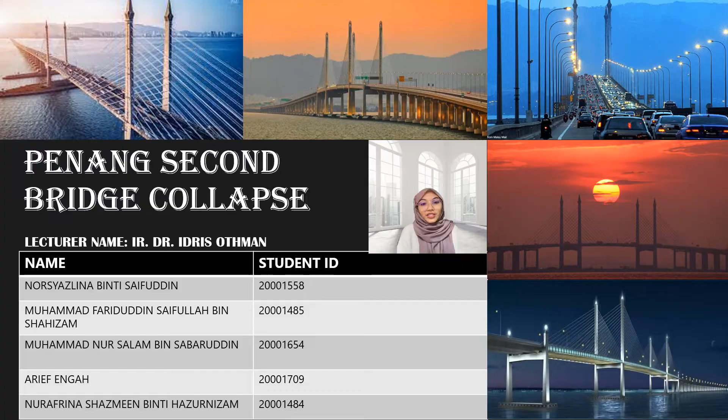I'm Norsyazlina binti Saifuddin and my groupmates are Muhammad Fariduddin Saifullah, Muhammad Nur Salam, Muhammad Arief Engah and Nurafrina Shazmeen. Penang Second Bridge is one of the largest projects in Malaysia back in 2013.

The length of the bridge is 16.4 km, while the length of the expressway is 7.1 km. So the total length of the bridge, including the expressway, is 23.5 km. The total cost of the project is 4.5 billion ringgit Malaysia. The overall construction period is 60 months, which equals 5 years.

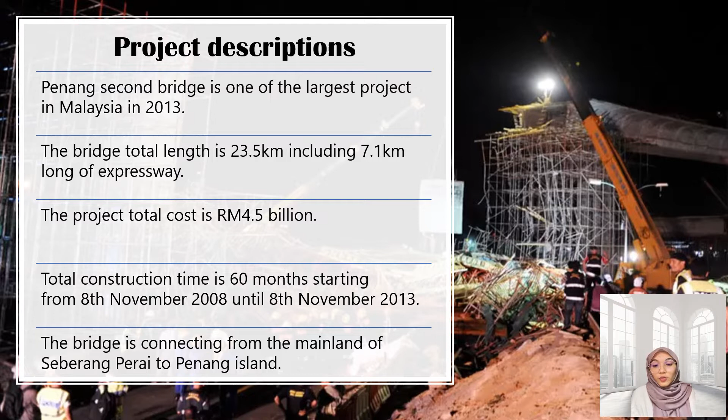The project starts on 8th of November 2008 and finishes on 8th of November 2013. The bridge is officially open to the public on 1st of March 2014. The bridge connects the mainland of Seberang Perai to Penang Island, which are Batu Kawan and Batu Maung respectively.

Next is the details of the incident. A 30-meter long section connector of the bridge at Batu Maung interchange, which was under construction, collapsed on 6th of June 2013 around 6:50 p.m.

The incident caused the death of 1 civilian and injured 4 others which is 2 civilians and 2 workers from Indonesia and Myanmar. In order to set the victims free, 4 hydraulic jacks were installed to lift the debris and rubble of the collapsed ramp.

The injured victims were hurt by falling concrete and steel when the interchange ramp collapsed. The construction companies involved in this project are Cergas Murni Sendirian Berhad and Giga Engineering and Construction.

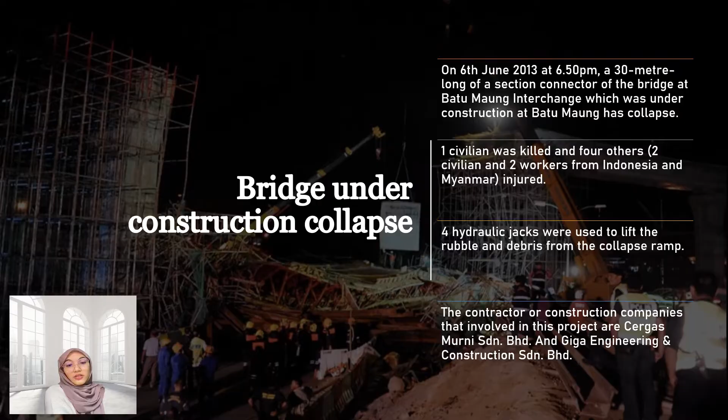The possible causes that led to the incident are being investigated from several aspects. The first is from the Code of Ethics, related to Board of Engineers Malaysia (BEM) and Occupational Safety and Health Act (OSHA). The second is from the designation of the project. The third is from the management aspect, and the last is the nature aspect.

The first factor that led to the incident is the contractors did not register their workers with the Construction Industry Development Board (CIDB). From CIDB Act 1994, Act 520, workers at a construction site must have industrial personnel registration cards, or green cards, to prove that they were registered with CIDB.

The second cause is that formwork support failure was the cause of the collapse. According to the Act, contractors and workers need to follow the exact design, and any changes need to be approved by the engineer or designer.

The third is poor risk management. The risk management of the project must be scrutinized to prevent unwanted incidents. The road was not closed or diverted, and the public had to pass under the concrete ramp which was under construction. The last cause is the malfunctioning drainage system at the construction site.

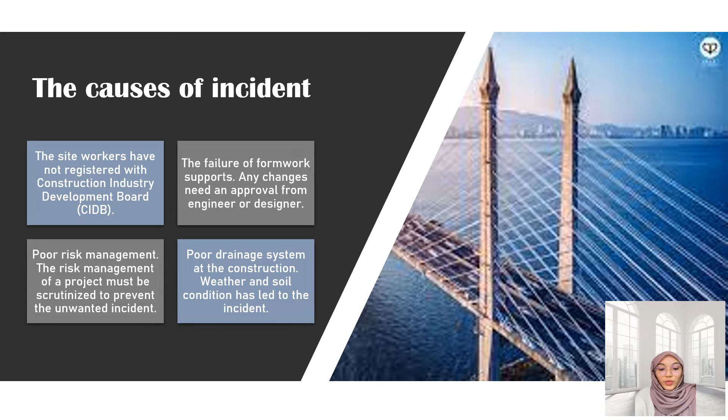Another cause that led to the incident is the weather and soil condition. The structure was built on low-lying ground. When the rain came, it turned the low-lying ground into a water retention pond, as there was no drainage to quickly remove rainwater from the area.

Next, the following are the objectives of this research project. Number 1 is to investigate the procedural and technical negligence by the contractor for not registering workers with the Construction Industry Development Board (CIDB). Number 2 is to investigate the cases that contravene the design project specification that caused the ramp collapse. Number 3 is to examine the environmental and public safety aspects of the structural collapse due to poor risk management and poor drainage system.

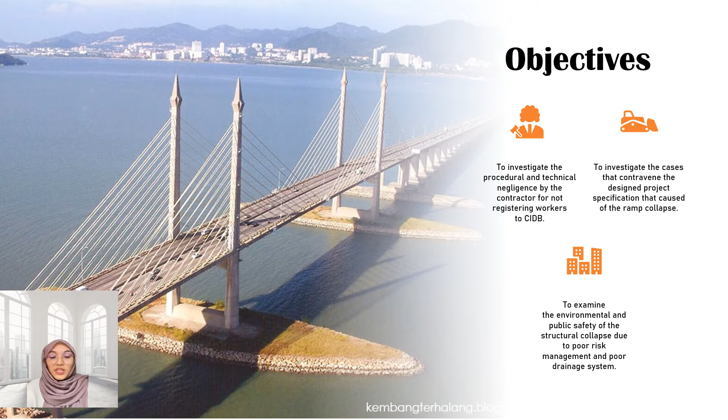Assalamualaikum, I am Nurafrina Shazmeen binti Hazurnizam. I will continue with the rescue operation of the Penang Second Bridge collapse. In this part, I will talk about the reported article, the rescue personnel, and the rescue operation.

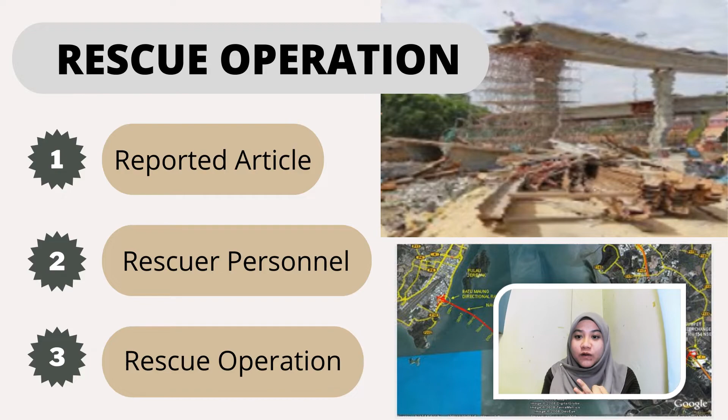The first reported article, on the Malaysian Insider, said that the scaffold supporting the construction of the second Penang Bridge collapsed and killed a passing motorist. The commission at the time stated that the collapse was because of the failure of the scaffold.

The bracing installation was not constructed according to the drawing. Supposedly, the diagonal bracing needed to be in the transverse direction to reduce the load-bearing capacity.

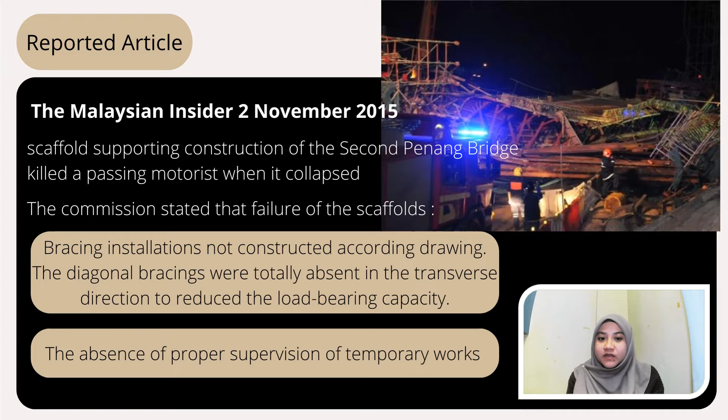Also because of the absence of proper supervision of the temporary works.

The second article is from Awani. It said that a 30-meter concrete slab weighing more than one ton crashed down to the ground. A crane is being used to lift part of the debris for the rescue effort, and several fire brigade trucks were rushed to the scene at about 7 p.m., where the collapse happened around 6:45 to 6:50 p.m.

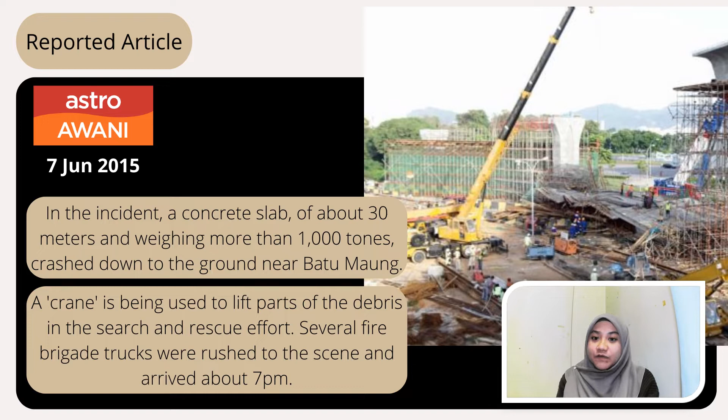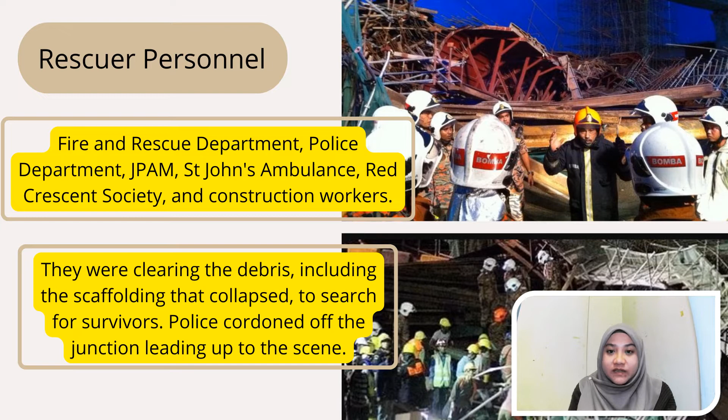Next is about the rescue personnel involved in the rescue operation, which include the Fire and Rescue Department, Police Department, Jabatan Pertahanan Awam Malaysia, Saint John Ambulance, Red Crescent Society, and construction workers. It stated that more than 300 rescuers worked at that time. They were clearing the debris, including the scaffolding that collapsed, to search for survivors. Police cordoned off the junction leading up to the scene for their safety.

The rescue operation: as the ramp collapsed around 6:45 to 6:50 p.m., the fire and rescue department arrived at about 7 p.m. They cleared the rubble to allow rescue, or to approach the stranded car. There was a car that crashed down below the slab. They used a camera to detect the condition of the victim. The police commanded those with missing family members to call them as soon as possible.

After that, MTUC Penang called the Department of Occupational Safety and Health to conduct the investigation. As the probe began, the primary focus of the initial investigation was on the failure of the formwork support. The rescue operation has been going on for more than 14 hours.

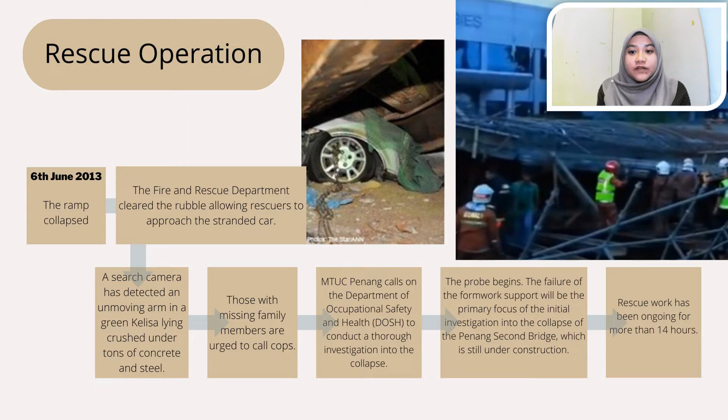Next, I would like to talk about the technical reasons for the failures of the second Penang Bridge. According to the Director of the Department of Occupational Safety and Health for the State of Penang, Muhammad Anwar MB, he said that the failure of the formwork support was one of the reasons that caused the ramp to fall. This is based on an early inspection conducted by his team.

When we begin a certain project, especially building a bridge, the technical designation of the bridge must be approved first by a relevant and qualified engineer. Any changes required for the formwork support must first be allowed through the engineer or the designer of the project to ensure the quality of the bridge we are going to build. Every parameter and calculation is important in the technical designation to produce the highest quality project.

Next, according to a report by the Penang Commission of Inquiry, the scaffold that collapsed at Piers 6 and 7 of Ramp 2 in Batu Maung was declared severely faulty or defectively constructed. This concludes that the formwork support of the bridge had failed, which caused the ramp to fall.

Next, the second technical reason for the failure of the second Penang Bridge is the poor supervision of the temporary works, which were not regarded with the same degree of care as granted to the permanent operations.

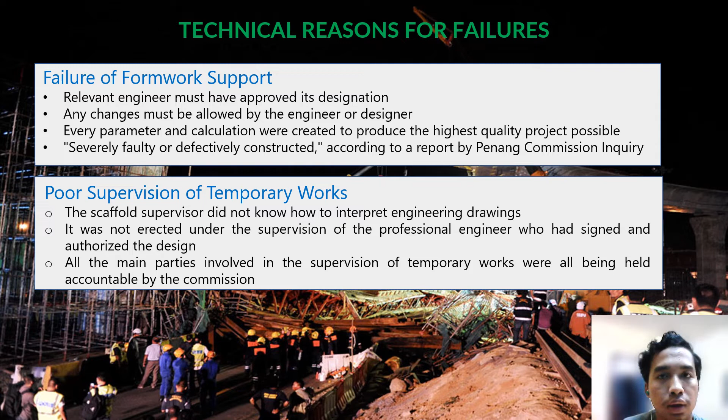Next, ethical reasons of failure. The Penang Second Bridge incident was caused by a few key violations of ethical practices, especially by engineers. Firstly, the engineers involved failed in maintaining the safety aspect of the project itself prior to the incident.

In executing any project, the paramount aspect is obviously the safety, health, and welfare of the public in the performance of engineers' professional duties. Engineers should recognize that the lives, safety, health, and welfare of the general public are dependent on their professional judgment.

Also, the engineers shall not approve nor seal plans and specifications that do not conform with accepted engineering standards and are not safe design, as it would endanger public health and welfare. The next ethical breach was Dishonest and Non-Integrity Act.

It can be said that the engineers in the project failed to act in such a manner as to uphold and enhance the honor, integrity, and dignity of the profession. In this case, the engineers passed and gave approval on the installation, although they did not properly inspect and supervise the erection of the structure. Therefore, an engineer shall not use association with non-engineers, corporations, nor partnerships as cloaks for unethical acts.

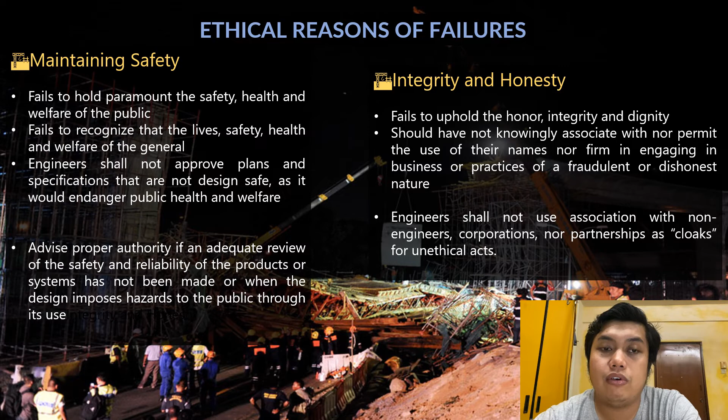The third breach of act was the unethical decision making of the responsible engineers. It is a fact that dilemma or predicament situations are unavoidable, where there is a difficult choice to make between two or more alternatives. Dilemmas are relatively common occurrences in everyone's lives. Like all people, engineers also face dilemmas in their lines of duty. Leading towards this incident, we can see that the engineers undertook some unethical decisions while performing their duties.

One great example was highlighted by the Penang Chief Minister's Office statement, which stated there was an absence of proper supervision of temporary works, which the Commission remarked was not treated with the same degree of respect accorded to permanent works. Therefore, it is clear that if the engineer had followed and done ethical decisions throughout the project, this incident is definitely avoidable. A code of ethics guides engineers in making this difficult decision by ensuring that they choose what is moral. They give clear guidelines into what decision is ethical and serves the interests of society rather than individual gains.

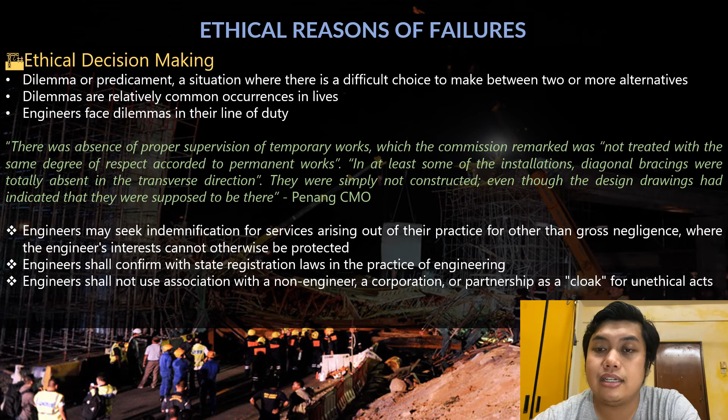Hello, my name is Mohammad Fariduddin and I will be talking about the recommendations to prevent similar failures in the future. The first one is adhere to the regulations and designs provided.

The design of any structural framework needs to adhere to the regulations. The engineers that design the structural framework have to ensure that there are no mistakes in designing the temporary structure. The workers also need to install or erect the structures according to the design. In other words, any changes made to the structure need to be consulted with the engineer that designed the structure, whether it is approved or not.

The second one is maintain supervision. Site supervisors need to monitor the workers on site. This is to ensure that there is no misconduct by the workers at the site. Site supervisors also need to supervise installation of scaffolds or frameworks to ensure they are done correctly and as per design. They also need to notify the higher-ups regarding any issue that arises on site.

The third one is allocate a safety department. The safety department will investigate and make proper safety plans throughout a project, where they will assess any risk that could harm individuals. They will also assign the appropriate personnel to each specific task according to the expertise of the safety personnel. For example, a scaffolding inspector will check the scaffold that is erected to ensure it is as per design, or recommend any changes that need to be made to the contractors if the initial design is not suitable for the work that needs to be done.

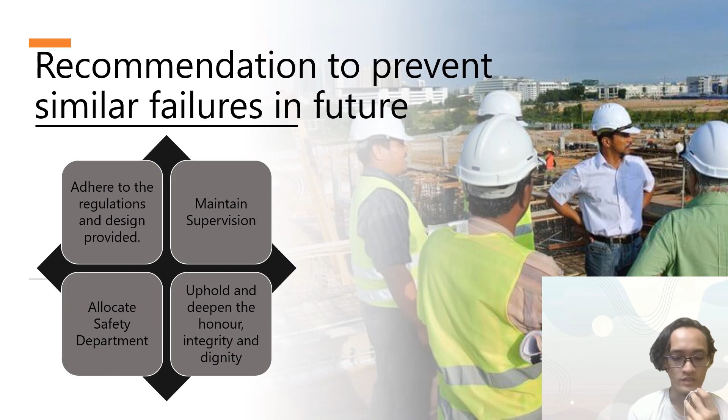To conclude, there are lots of ways for the industry to learn and change for the better from this incident, such as practitioners in the construction industry having to be aware of the highlighted issues and avoid the problems being repeated again in future construction projects. Next, proper and ethical practices will invariably lead to the same positive effect. Every party must take full responsibility to prevent problems associated with accidents, delays, and even legal litigation in this case. Lastly, players in the construction industry should investigate and implement appropriate solutions to solve common mishaps and unethical acts and problems in the industry.